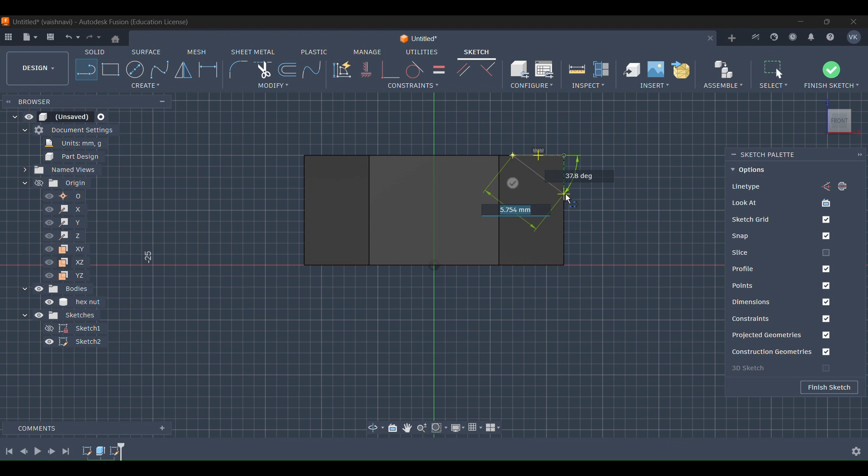Hi everyone, I am Vaishnavi and today I am diving into a project that looks very simple on the surface but taught me a lot about precision: designing a hexagonal nut in Fusion 360. In this video, I am not just showing you the perfect final result, I'll be actually including the trial and error I went through. From struggling with the constraints to fixing the thread collisions, you'll see the real process of how I have built this model from a simple polygon sketch to a fully functional 3D model part.

Here, first, I have used the polygon sketch tool starting right at the center or origin point. I have dragged the cursor out to a length of 10 mm and set the side count to be 6. The trial and error moment which I had to handle here was my polygon was blue, meaning it could still rotate and move. I had to apply a horizontal sketch constraint to the topmost line. This is a crucial step.

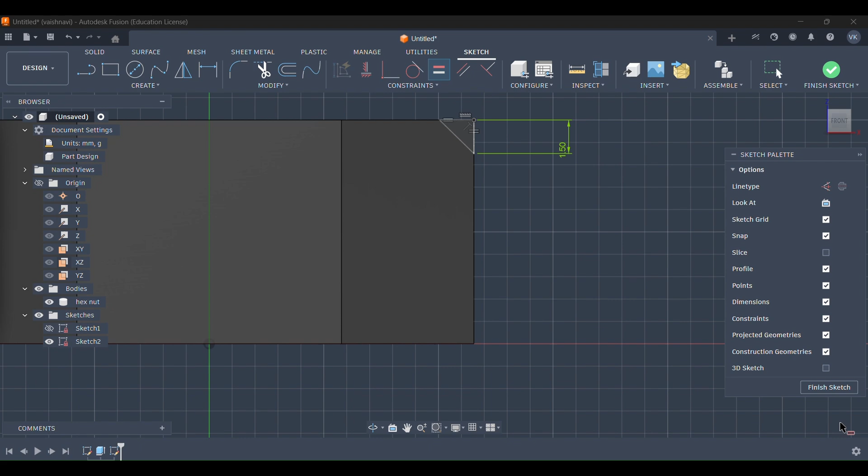You can verify this by looking at the red lock icon in your sketch folder. If you see a pencil icon instead, your dimensions are loose and your model might break later on.

Next, let's move on to the chamfer edge. Now here is a hurdle I have faced. Fusion 360's standard chamfer tool doesn't always play nice with the circular edges. So to solve this, I used a revolve tool workflow. To create a new sketch on the XZ origin plane, I couldn't snap directly to the existing geometry. I used the project command to refer to the corner points.

I sketched a triangle here, hiding the 3D body by clicking the eyeball icon so I could focus. Later, the dimension of the vertical line was set to 1.5 mm, and I used an equal constraint for the side rather than adding a second dimension. This keeps the geometry more clear and fine.

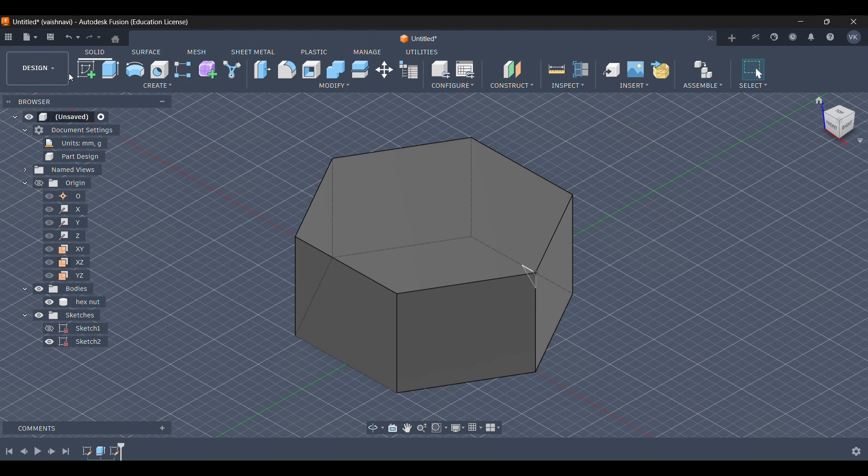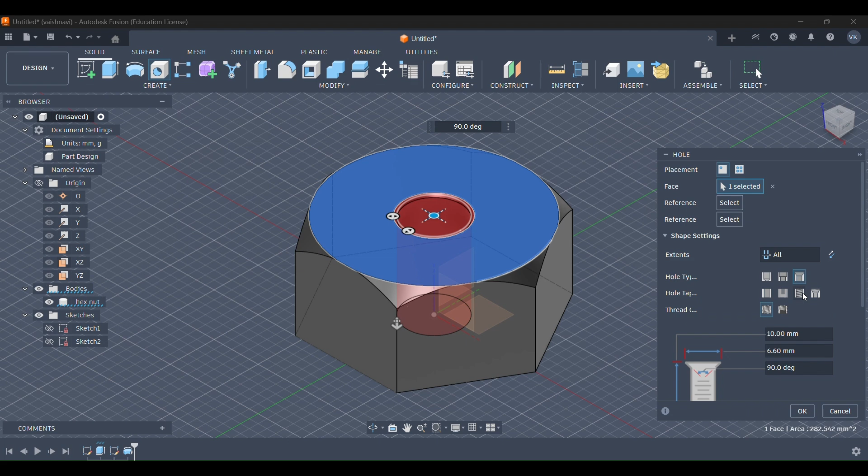With the outer shape ready, it was time for me to do the internal features. I activated the hole command. By selecting the Z axis, Fusion automatically detects the 3D body and switches the operation to cut. Here the technical specs I have used: type was countersink, hole tap type was tapped, drill point was flat, countersink width was 14 mm, thread type was GB metric profile and the size was 12 mm.

I made sure to check the modeled option. If you don't, the threads are just 2D images wrapped around a cylinder.

To save time and ensure symmetry, I have used the mirror command. Here I have created a mid-plane construction plane by selecting the outer face of the nut. The trial and error moment I had here was when I first mirrored the chamfer, the thread collided with the bottom chamfer, which was a major issue for me. I did this about 4 to 5 times again and again.

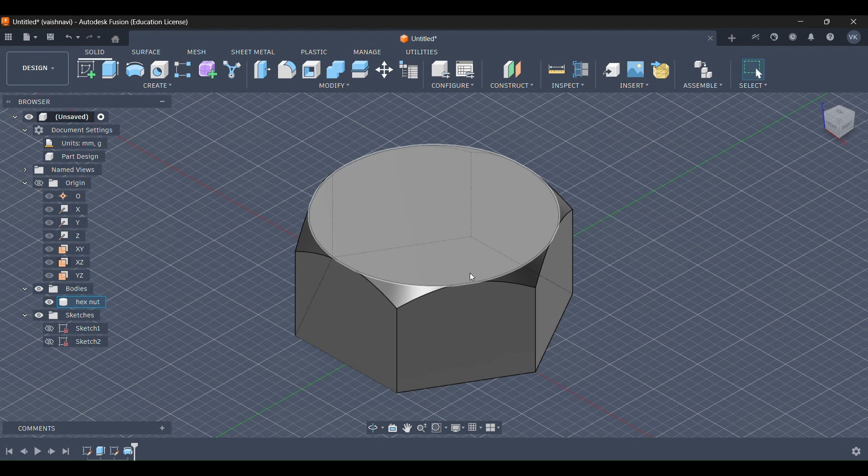To fix this, I went back into the timeline, double clicked the hole command and adjusted the thread settings. By setting an offset of 8.5 mm, I was able to clear this properly. And there we have it, a fully defined modeled thread hex nut.

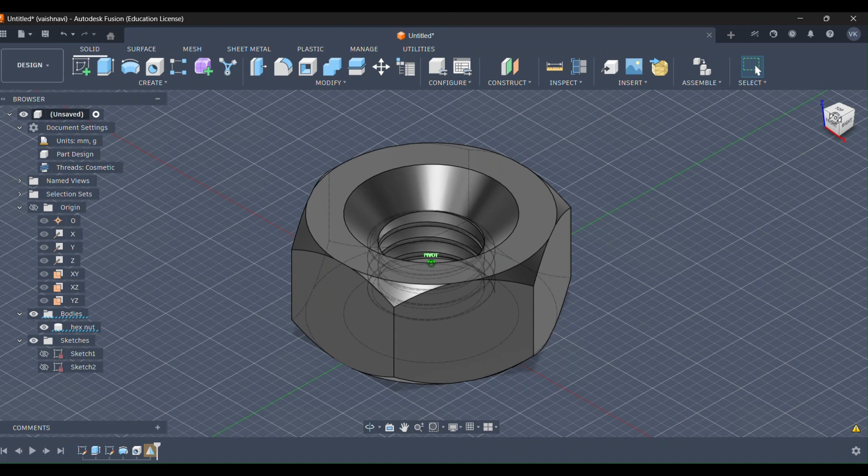By the end of this project, I achieved a much deeper understanding of how 3D bodies interact with sketch projections. Dealing with those thread collisions and constraint errors manually helped me realize that 3D design is as much about troubleshooting as it is about drawing. I have hidden my construction planes using the V key to clear up the workspace. This model is now completely done.